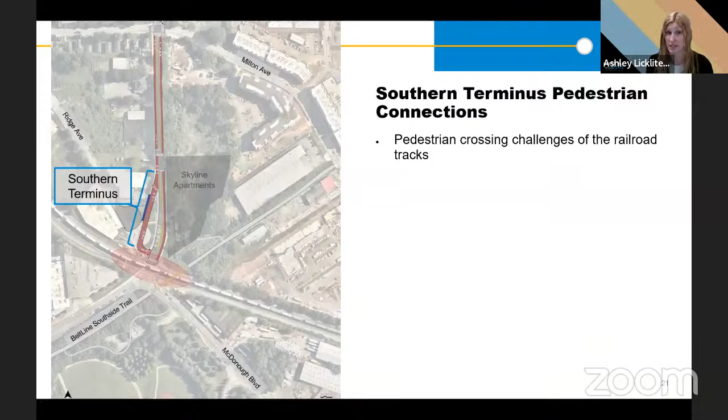So Cole, if you could advance to the next bullet. One of the things that is also happening in this area of the corridor is some great improvements to the Atlanta BeltLine Southside Trail. Folks may have seen some of the recent media coverage that the South Side Trail did get a RAISE grant, which is really awesome for our community that we can now advance this project.

And we will be having a couple planned access points to the Beltline that you can see here. Additionally, the Skyline Apartments is also a really exciting development in this area of the corridor to be able to provide wonderful residential uses. And they are also planning to make a connection down to the Beltline Trail as part of their development. Really excited to see the partnership there between the Skyline Apartments and the Atlanta Beltline, and just great partnerships in this area of the corridor.

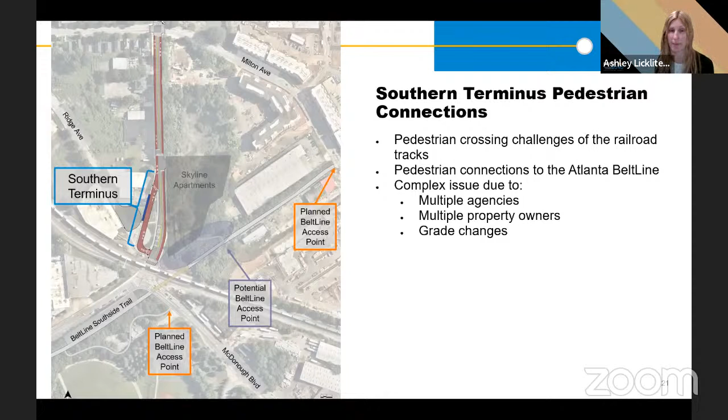And then the last thing I also wanted to mention is obviously, this is complex. We've got a lot of things going on here. We have the trail, we have the MARTA service, we have some redevelopment happening, and we also have the railroad. So there's a lot of different entities involved in finding a really viable solution to safe pedestrian access in this area. Greg has started to meet with other agencies, including the city, Norfolk Southern, and the Georgia Department of Transportation, that's actually in the process of upgrading this traffic signal in the location and providing some additional pedestrian accessibility, as well as those private property owners and the Atlanta Beltline.

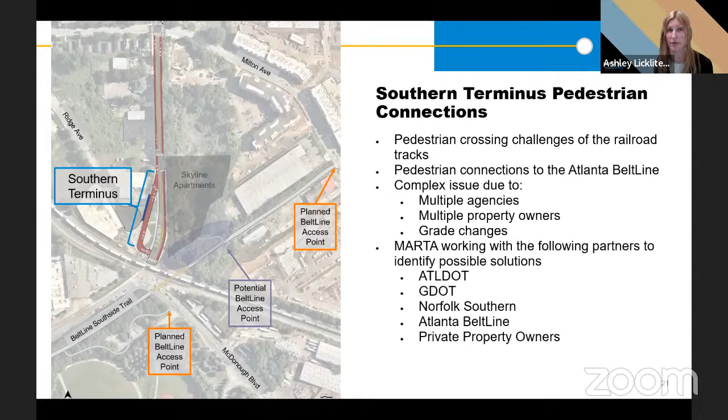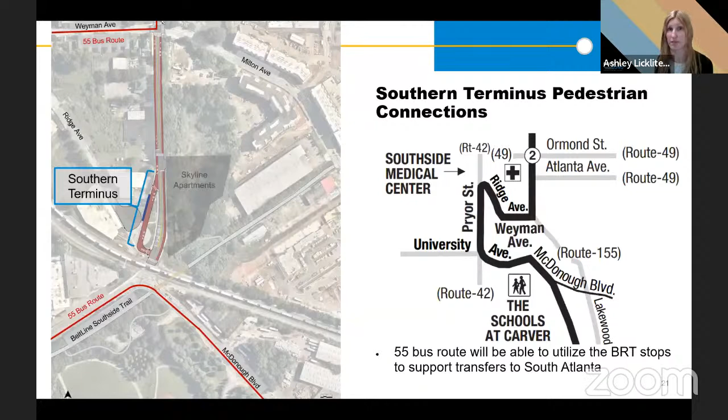And the last thing I wanted to mention is the MARTA Route 55 service. So there is great service that MARTA is providing right now in this area that does also provide accessibility in the area and across the railroad track. So again, MARTA is working in partnership with all of these additional entities to make sure that we come to a good solution for the community that does provide safe and accessible connections in this area.

We also had some pedestrian connections at the 3 heavy rail station locations. So just taking a look at those, we wanted to make sure that it was a good experience for the pedestrians after they get off the bus and making their way to the station. The one we talked about a little bit earlier, where we showed you the MLK station, and then this Georgia State station just being right around the corner.

So what we did is we went out there and we took a look at the current conditions and what's going to be needed in order to bring the sidewalks up to a reasonable state, and also taking a look at any curb ramps. We looked at lighting conditions, making sure that those are well kept as well. And some of the wayfinding too.

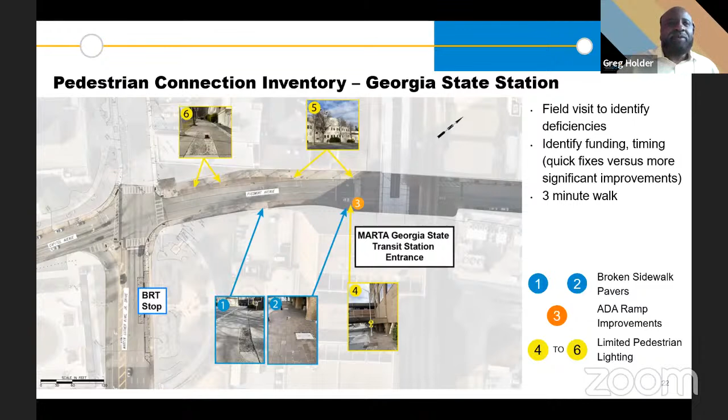You may have visitors or folks that get off and not know exactly where the heavy rail station is. So what we noticed is that the wayfinding signs are actually right at the station. So we would have some from the BRT just kind of letting them know to go around the corner or whichever direction they need to go to.

But what we're showing in these photos is basically just some of the conditions out there, maybe needing, one of them needs some hexagonal pavers replaced, or any trees that are upheaving some of the pavement or the sidewalk that may need to have those trip hazards removed, putting in any curbing that's needed, as well as lighting.

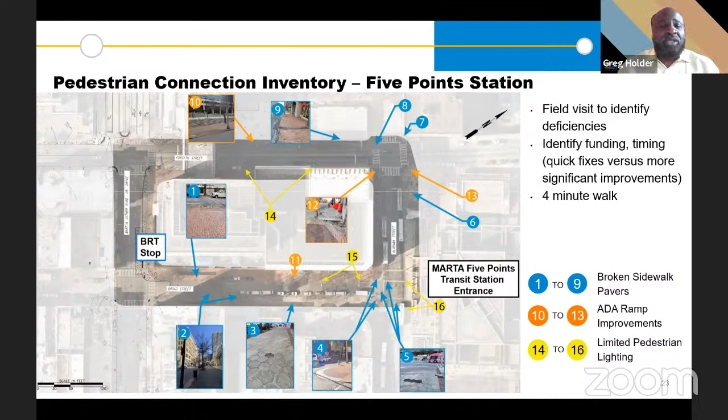And so this shows the 5 Points station, where you've got actually 2 opportunities to go to the station from the BRT stop. You can actually go along Broad Street, or you can go along Forsyth. So we looked at both the top and the bottom location. And of course, Garnett, where you get off at Mitchell Broad, and you'll just go across to Trinity, and then you'll go right along into the station.

And so we just looked at the situations out there. We've been working with our agency partners, City of Atlanta, and also from there, we'll be talking to some developers in the area. I know Newport's doing work in that area as well, that are looking like they are ready to assist and help out, making sure that the project's a success.

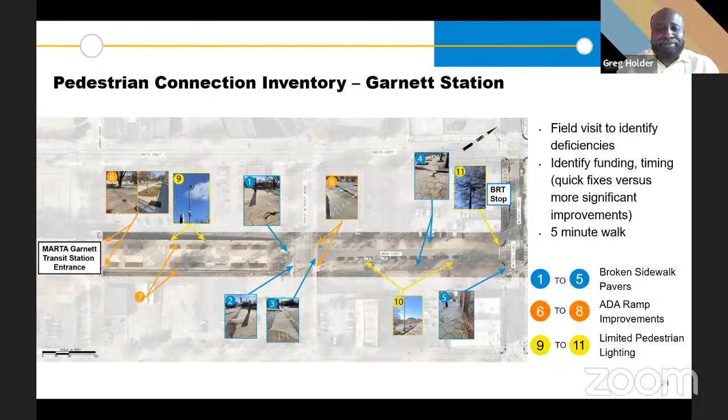And then the dedicated lanes, that was something else that we heard. For the most part, 85% dedicated lanes. This is a really good BRT project, because nationally, they consider anything over 50% dedicated lanes to be a fixed guideway. So with us coming in at 85, that came in relatively high, but we still wanted to look at whether there was any opportunity to get even more.

On that particular side, the bus is on the extreme right side of the roadway where it stops, and it actually stops on the near side before the signal. Then to go through the signal, it would have to work its way over to the left most lane in order, when it gets up that 1 block to Ted Turner, to make that left turn. Because there's only 2 lanes going up that direction, at this point it wasn't really a good option for us, because the bus has TSP and typically can get out before traffic, or right after the traffic, so it wouldn't have much competition at this point. So we just said it was an opportunity to look at that location, but at this point we weren't going to make the change.

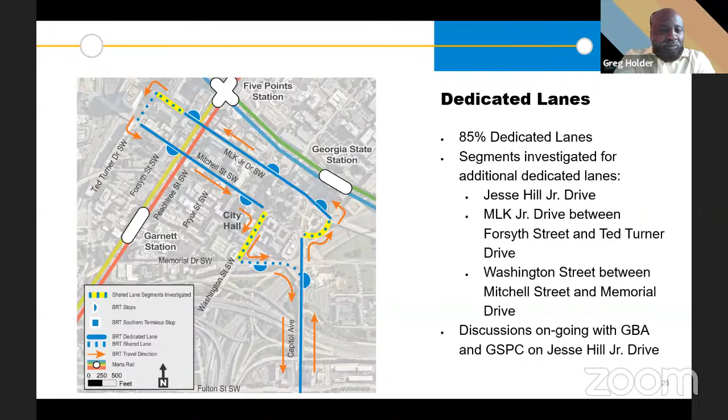And so the bus enforcement was something else that we heard. At this point, what we're planning to do is some major education and marketing campaign to make sure everybody understands how to operate, especially around a bus only lane. This is our first ever bus rapid transit in the area, so there's going to be a lot of education out there that we'll have to do. Along with that, we also have the backing of the Atlanta APD, who will be there helping with enforcement. We're also looking into other areas, like camera enforcement, which is something we're pursuing. Of course, that would be more than just us pursuing it — it has to pass the Georgia Assembly.

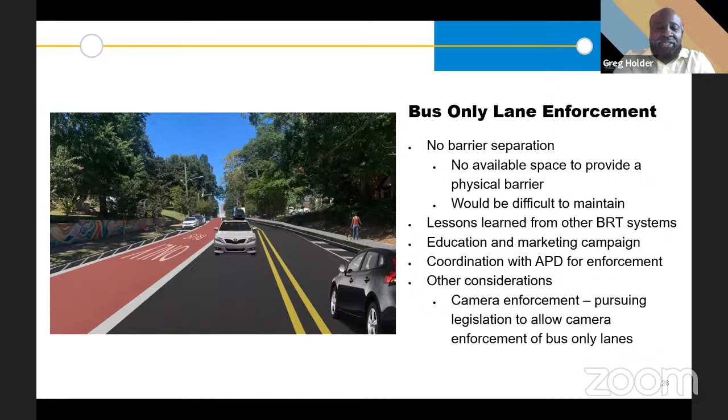There's a little bit more we're doing to get that enforcement out there. But there's one thing about having these lanes as well - there's no barriers, because we didn't have the width on the roadway to put barriers on the lane. But if there's some sort of issue in the lane, the bus has the ability to go around it and get back in the lane and keep going. So that's actually another plus for these BRT lanes.

And I'll hand it to Ashley with the bikes. Thank you, Greg. So another one of the great comments we heard from the community was a desire to make sure bikes were able to be safely accommodated along the corridor. And Marta has worked really hard with the team at the City of Atlanta to figure out ways to do that. So I just want to talk through a few things.

The city is going to be moving forward with the Washington Street Cycle Track project, which is a really exciting project to provide great north-south connectivity along that route. So what we've done as part of the BRT project is make sure we provide connectivity into that Washington Street cycle track. That's going to look different depending on what corridor you're on.

Along Trinity, we have a short section that will be sharrows and just shared spaces. As we move on to Memorial and start down Capitol, we'll have a combination of bike lanes that are either on the sidewalk or on the road, depending on available space. The bikes will have dedicated space that won't be shared with pedestrians, the bus, or cars - all dedicated space as we continue south down towards Hank Aaron.

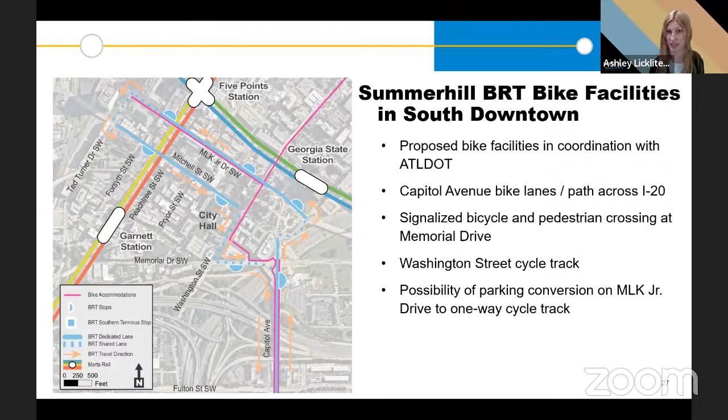We do want to mention, Cole, if you could hit the next slide - we want to make sure we're providing future connectivity as we get further along the corridor. I know you saw in the cross section earlier the area where we're doing the redevelopment at the Publix grocery store - we are going to have bike lanes in that area.

And we want to make sure we connect to future bike facilities along Georgia Avenue, which will give us great access to eventually get down to the redevelopment and improvements of the Atlanta Beltline and the South Side Trail. So what we envision is using some of our great neighborhood streets to provide lower stress and safe bike accommodations to get people down south to DH Stanton Park and eventually to the Beltline.

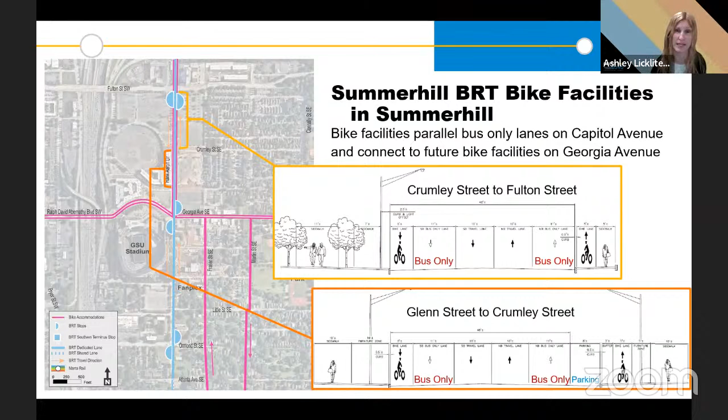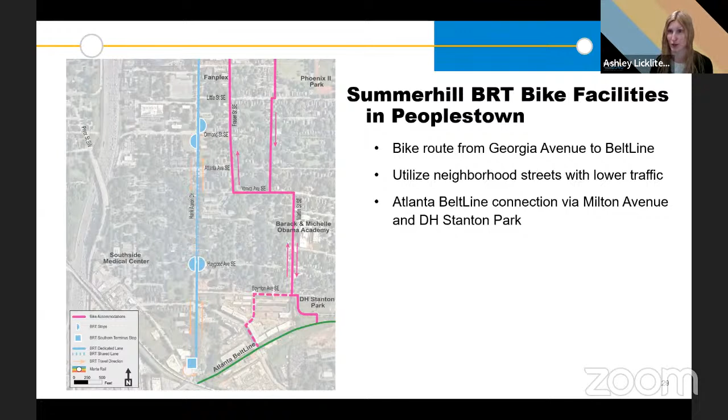So we really appreciate the comments that came through from the community. Marta is very focused on understanding that folks using the BRT may also be taking their bike on the bus, and we want to make sure when they're getting on and off they have safe places to access and go. Thank you so much, Cole, for sharing these great slides.

All right, so we want to talk to you a little bit about the project timeline. As you can see, there's been a significant amount of work completed as the project is nearing this 90% final design milestone. You can see the boxed area - that's where we are at this point.

We're scheduled to complete the design by the summer of this year, and then we'll advertise the project for construction bid. We're anticipating starting construction in the late spring of 2023, and anticipating construction to last roughly about 2 years, so it'll be finished in spring of 2025. Then we'll complete the system and vehicle testing and any training that's needed, and begin revenue service in the summer of 2025.

So it's pretty exciting times. Project has definitely moved along. So with that, we'll stop here and give everybody an opportunity for any questions or further discussion on the project.